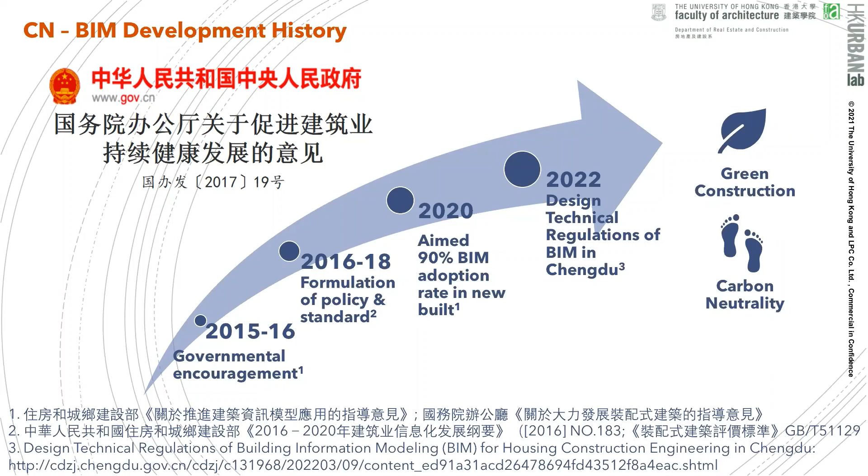Why do we want to digitize? There's no difference - our goal is the same. So what about Hong Kong? Well, there's another China situation in this slide.

We also did a lot of study through project consultancy research. I was quite lucky - we worked with one of, actually the biggest real estate developer at the time, to help the organization digitize the way that they build. They build lots of shopping malls and residential complexes across China. The challenge is they want to build more, but with good quality and with less manpower as well.

They actually have had a mindset change - not bombing people into the project, they want to do quality stuff. But how? It's not easy. It's almost a 0-to-1 journey for them to digitize the way they work.

So these are all the challenges: no standard, people seem to underestimate the value - what BIM or digital approaches can actually bring to different stakeholders. And number three, talent - not enough people. I think we share common challenges as well, including the economic benefit of BIM - that comes top, why it doesn't work, and where the challenges or barriers are.

So what about Hong Kong? Our team also did a survey - the biggest survey in Hong Kong - trying to compare the data between 2020 and 2019. We reached out to around 7,000 firms in the market - architect firms, surveying, structural engineering, all these. We got around 1,700 responses. We worked with CIC, the local Construction Industry Council, for this survey.

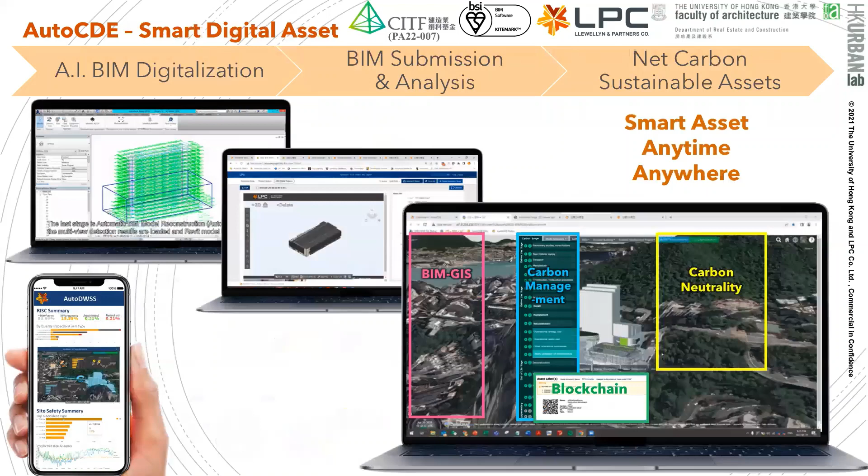So this is some of the interface of our platform. On the left-hand side, not just for new builds, for existing buildings as well, we've got our AI engine in our platform. So for any CAD drawings that you submit, we immediately turn it into a BIM model, okay? So you don't actually need to do it manually. Architecture structure is 100% accurate.

MEP, it really depends - some of them have a very fancy shape, we may not be able to model the shape exactly, but we can 100% integrate the asset data into that object through the engine.

So the middle part, we let different stakeholders resolve the spider net issue, just using one interface to talk about collaborative working. When they input their knowledge, they use the same BIM viewer to build the progress of the project.

So right-hand side, same data set, and then you can turn it into different business needs. So put it on the map, and then you can talk about bigger analysis when the government is interested in the smart city. So right-hand side here, we real-time monitor the carbon emission of this building.

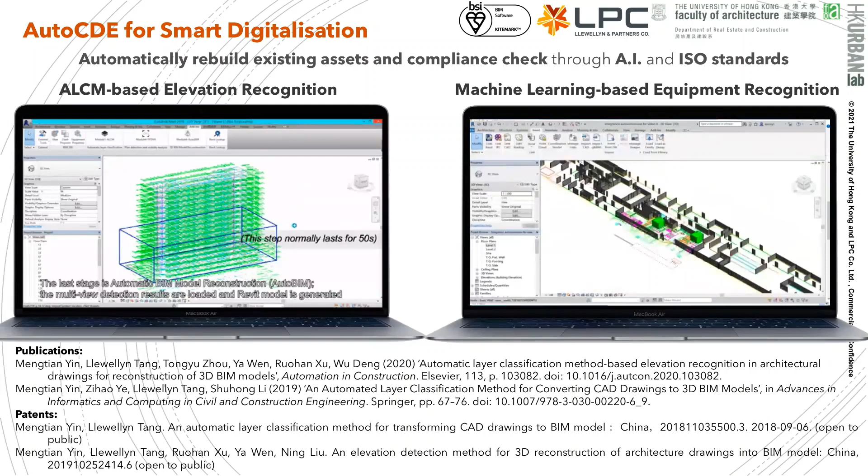So they show how we can quickly rebuild the asset, or build a digitized version of the model, very quickly. So that's the algorithm. We've got a paper published - if you are interested, later we can talk further.

Analysis, dashboard - not just the AI engine, but simple project management concepts like Gantt charts. People like something really simple. We've got very good project managers, but we're asking them to also take care of the digital version of the building. I think that's too much, or separately you've got a BIM manager looking after the digital version, but he's not the one building it. It's hard to bring the two pieces into one. You need one person to track project progress, but the digital version of the built asset has to come earlier, before you build it. So here we integrate traditional project management - Gantt chart, P6, all these - into our platform, so project managers find it easy to use.

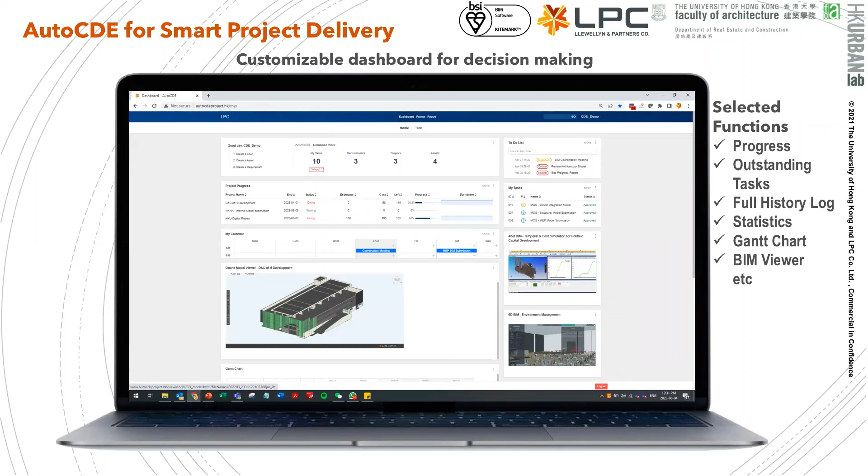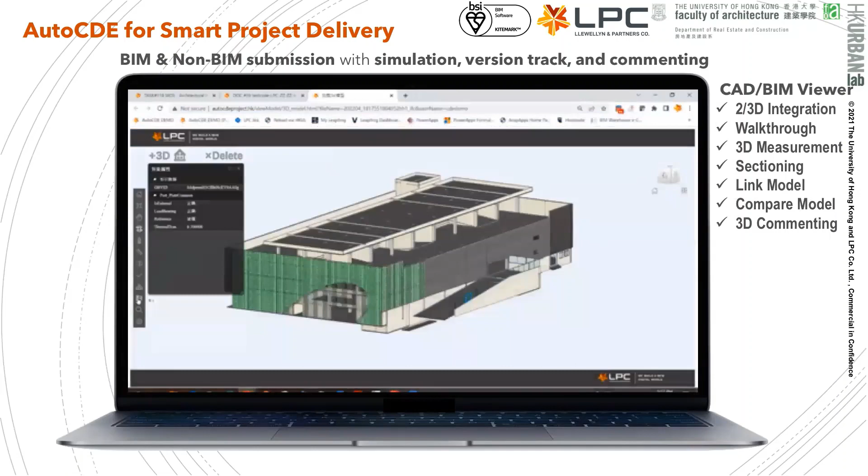Whenever they want to see the digital situation on site now, they can click into the platform and see how it goes. 2D, 3D - as you can see, the majority of very experienced managers are still more familiar with CAD, from a CAD perspective. So we synchronize the 2D and 3D as well. Whenever you change it in your BIM model, it is synchronized with the 2D as well, so you don't do double working - that's important. Or if they want to work in 2D, they can easily make changes there, and it automatically synchronizes with the BIM model.

So marking mode is a simple workflow - just give comments and then export as a PDF, or even send it via WhatsApp. But the data source here is always high quality, and this is the root data source as well, being stored in the CDE platform.

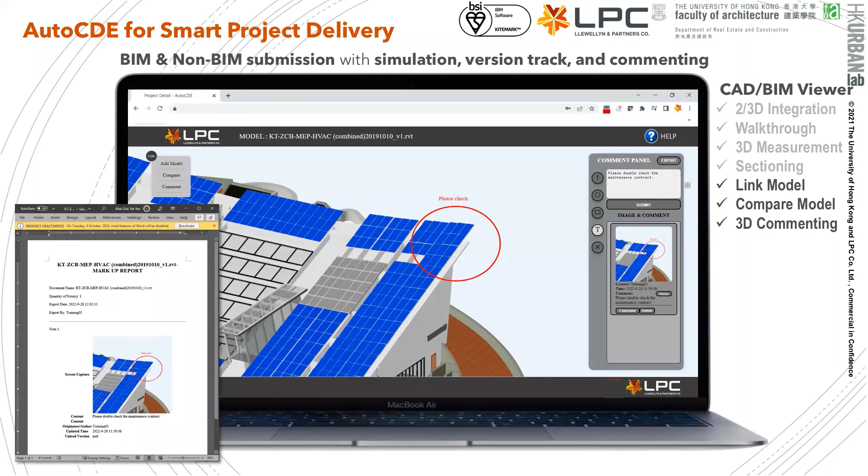So the dashboard gives different stakeholders responsibility. Whenever they log in, they see what they need to do on a daily and weekly basis. A simple traffic light system works well, particularly for the project manager - things that need attention from senior management can be pushed to them, saying we need your help on that.

Another area is costing - we're doing a lot of 5D costing as well. We've got a very powerful database in the platform now, so we use an AI-driven way to automatically get the cost from the model, because the materials and data in our platform are quite high quality. So to us it's doable now - we can talk about AI costing of the building, how much it actually costs the client. In particular, if you have lots of assets happening at the same time, you need that figure to plan your resources. A single asset isn't a problem, but with multiple assets it becomes particularly important and useful.

Underground - once we have the golden thread of information, not just the model, we can talk about underground as well. We've got lots of projects integrating the underground piping model with the overground build model, into the same platform.

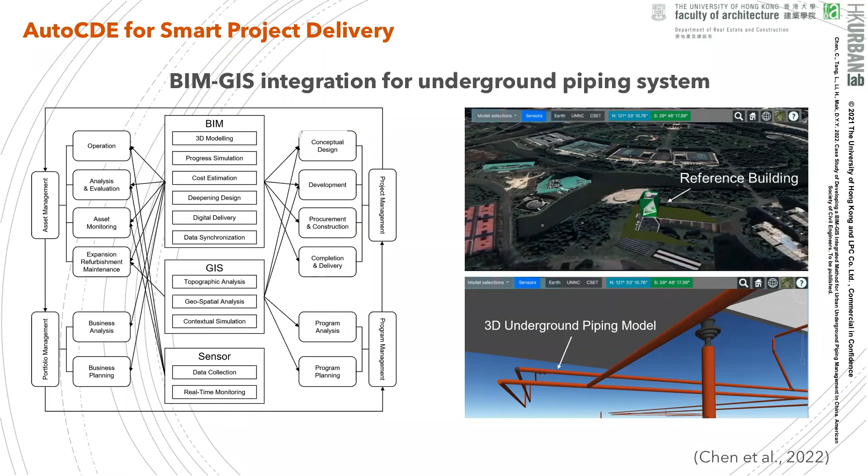So here's the one I showed you before - how we monitor the carbon emission level. It's particularly interesting - it's real time, and the client actually knows how much carbon they're generating on a daily basis. Now we're working on the next step, how they can achieve carbon neutrality. We're studying the metrics and ways to help the client cut down carbon across the life cycle. We're doing that part as well, and monitoring shows in real time how much carbon the asset is generating from all the activities happening in the platform.

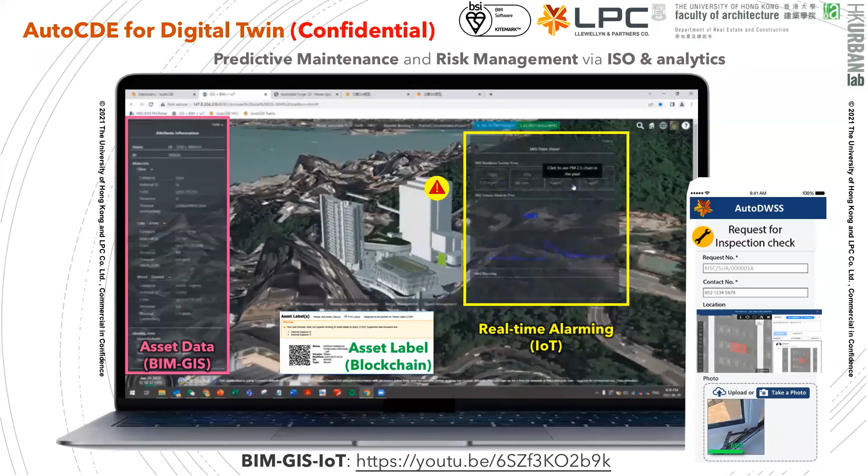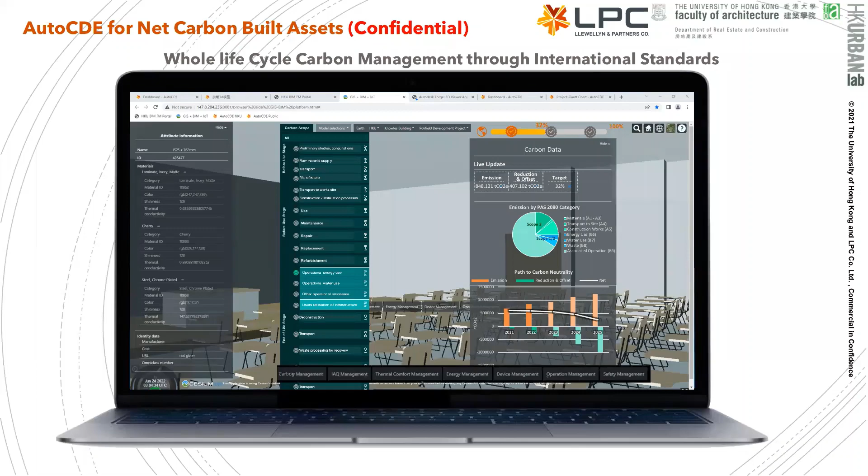Some of the research we're doing - this shows one of our researchers working on graph neural network based semantic parsing, looking more in depth on IFC, kind of like the iPhone Siri concept.

Next step, through the platform you can speak to it. When you're operating the asset, you speak to the platform what you want, and because we've got the knowledge base to back it up, the platform can give you advice on the best solution for how you're operating the asset.

So the value chain, something to share - clients are interested in how much money we save them. We're doing this kind of analysis for our client through the platform, but we look at more than just time and cost - also information quality, how usable it is, how current it is, how trustable it is. Remember I talked about the function on information assurance - how trustable this data is. We're doing this quantification for our clients as well.

Another example, not just at project level - we've got a client with around 1,000 assets across Asia Pacific. We're analyzing how mature it is in terms of digitalization across all the assets. Again, not just project level, we look at the team too - how well they communicate throughout the digitalization process - and also at the enterprise level, how supported it is, how much resources are actually put into the whole digitalization journey. Very interesting stuff that we're doing.